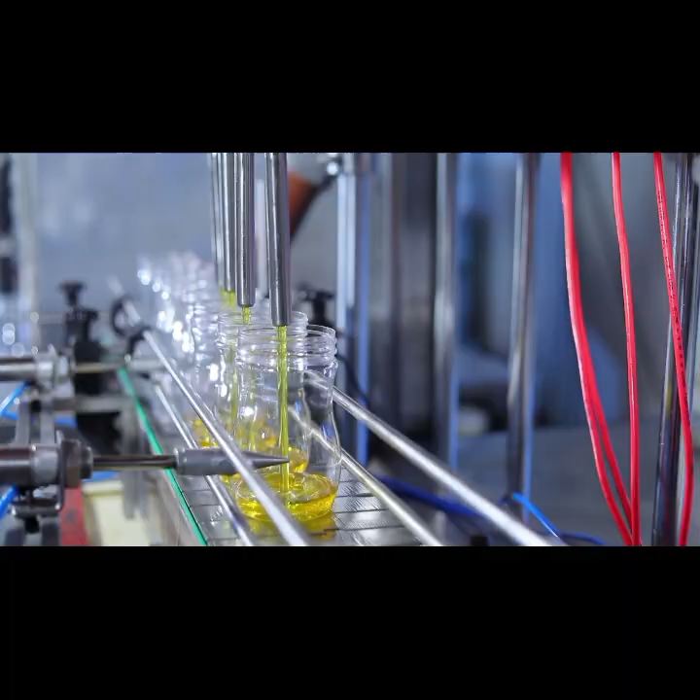Have you ever seen a factory line where machines move with perfect timing, sensors detect every product, and motors run automatically without human control? Behind all that precision lies one of the most powerful inventions in industrial history, the PLC, or Programmable Logic Controller. In this video, we'll explore what PLC programming really means, how it works, and why every modern industry, from the Gulf region's oil fields to Western manufacturing plants, depends on it.

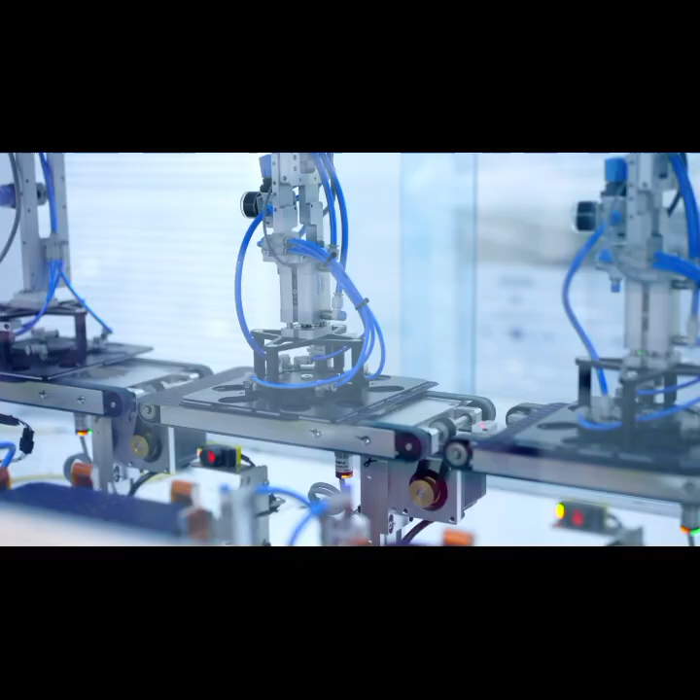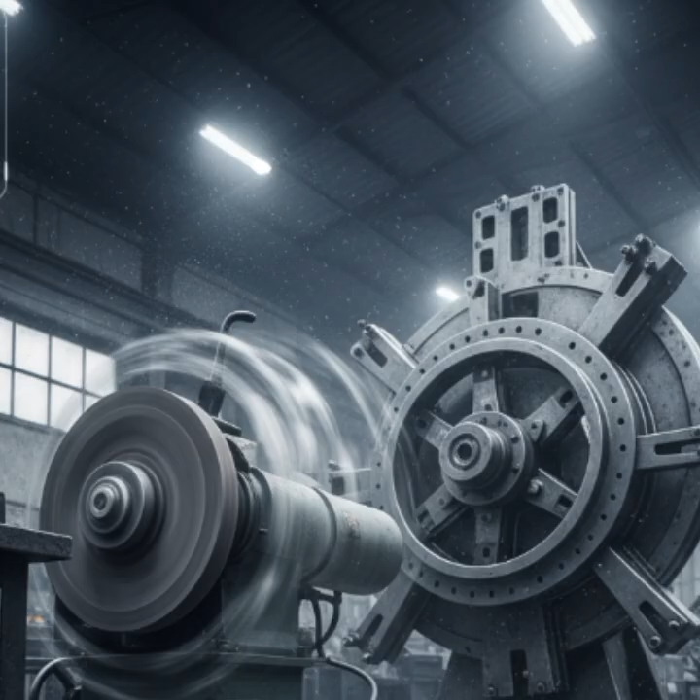1. What is a PLC? PLC stands for Programmable Logic Controller. It's basically a small industrial computer that controls machines and processes. But unlike your home computer, a PLC is built to work in extreme conditions: high temperatures, dust, vibration, and electrical noise. In simple terms, the PLC is the brain of an industrial system.

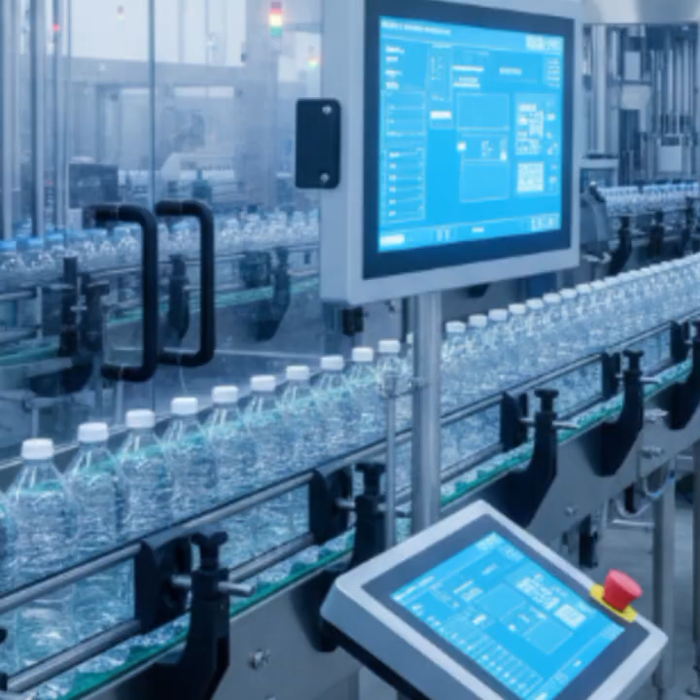It takes inputs from sensors, processes those signals according to a programmed logic, and sends outputs to actuators like motors, valves, and relays. For example, imagine a water bottling plant in Dubai. Sensors detect when a bottle arrives at the filling station. The PLC processes that signal and commands the filling nozzle to open for a specific time. Then it tells the conveyor to move the bottle to the next stage. All this happens in milliseconds, perfectly timed and controlled.

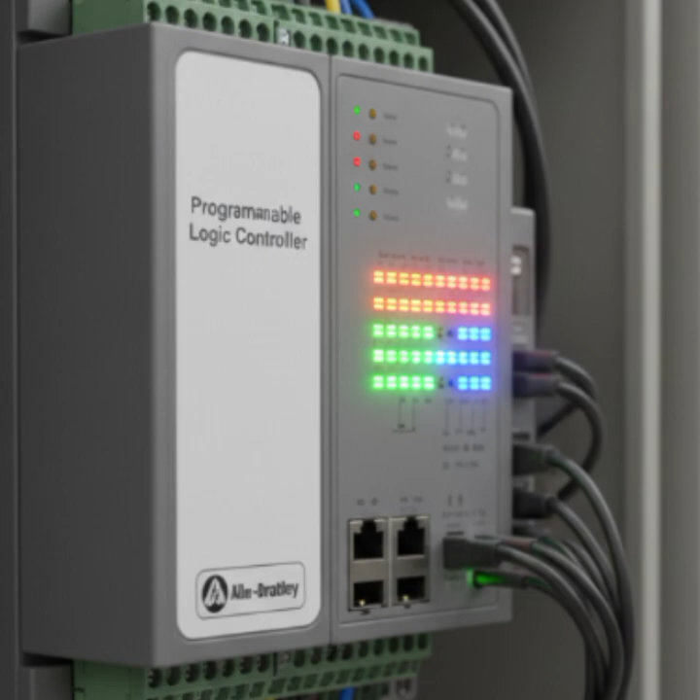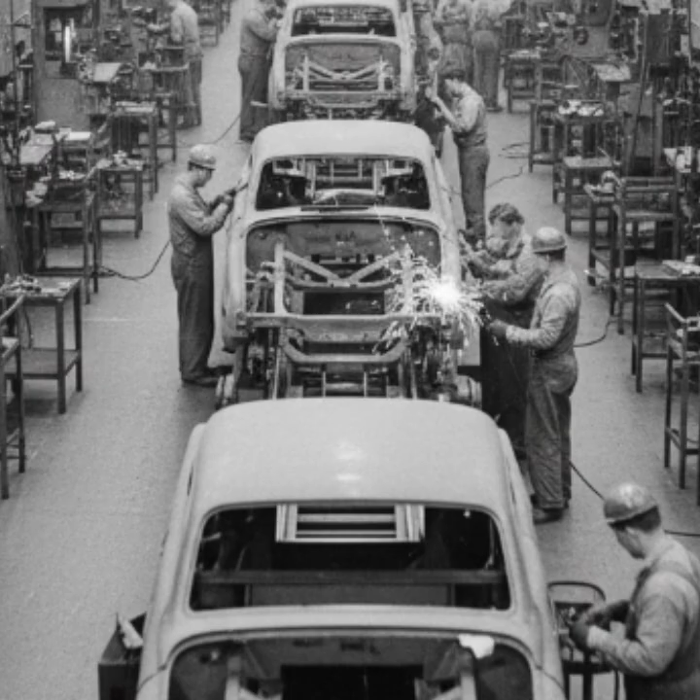2. Why was the PLC invented? Before PLCs, industries used complex relay panels, hundreds of relays and timers wired together to perform simple control tasks. If a process needed to change, technicians had to manually rewire the entire system. In 1968, engineers at General Motors needed a better solution for their automotive production lines. They wanted something flexible, reliable, and programmable, and that's how the first PLC was born.

Since then, PLCs have evolved from simple logic devices to powerful industrial computers capable of handling thousands of I/O points, communicating over networks, and even performing advanced diagnostics.

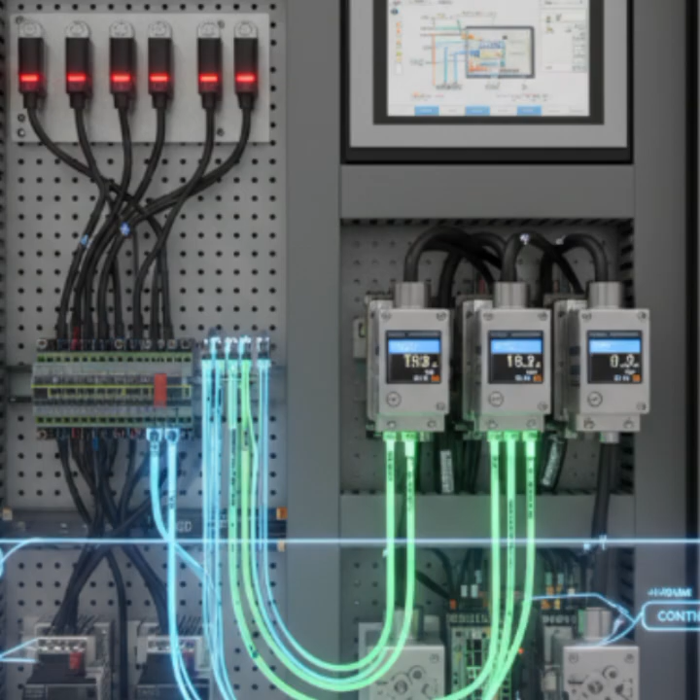3. How PLCs work. Let's look at how a PLC actually works. A PLC system has three main parts: input, processor, and output. Input section: this part receives signals from sensors like limit switches, pressure transmitters, flow meters, and proximity sensors. The signals tell the PLC what is happening in the field, for example, whether a valve is open or closed.

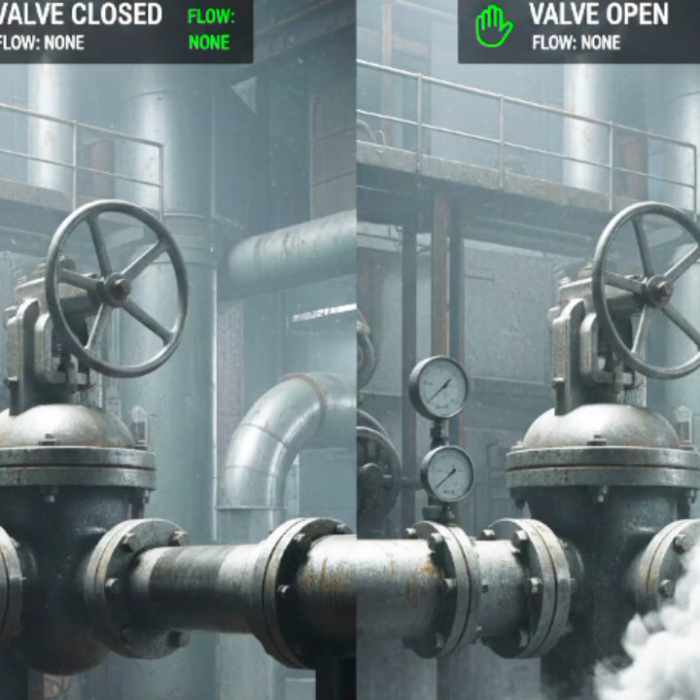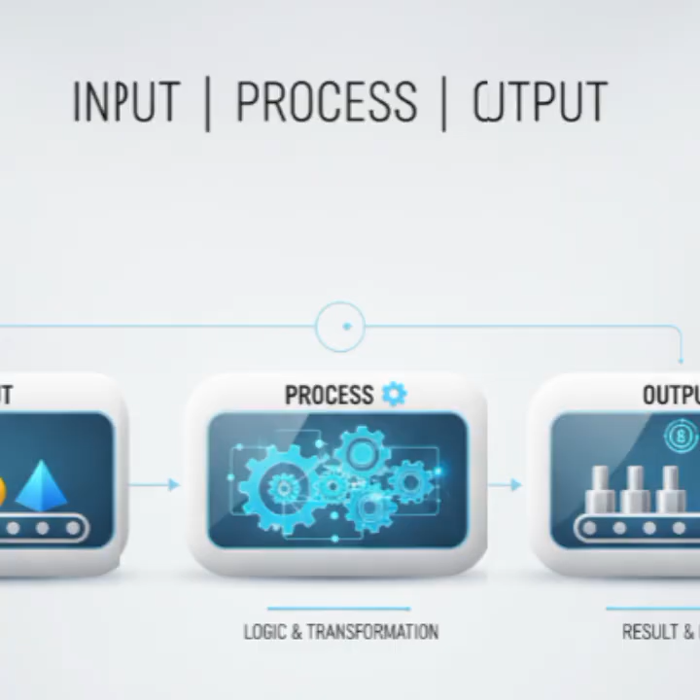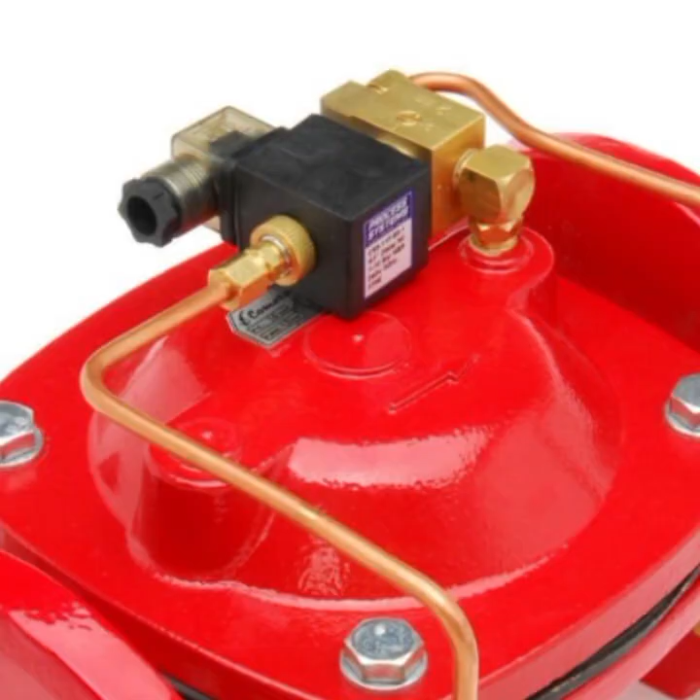Processor or CPU: this is where the main logic or program runs. The CPU continuously scans all input signals, executes the programmed logic, and updates the output devices. Output section: this part sends signals to control devices like solenoid valves, contactors, alarms, or motors. This entire cycle, read inputs, execute logic, update outputs, is called the scan cycle. And it happens hundreds of times every second.

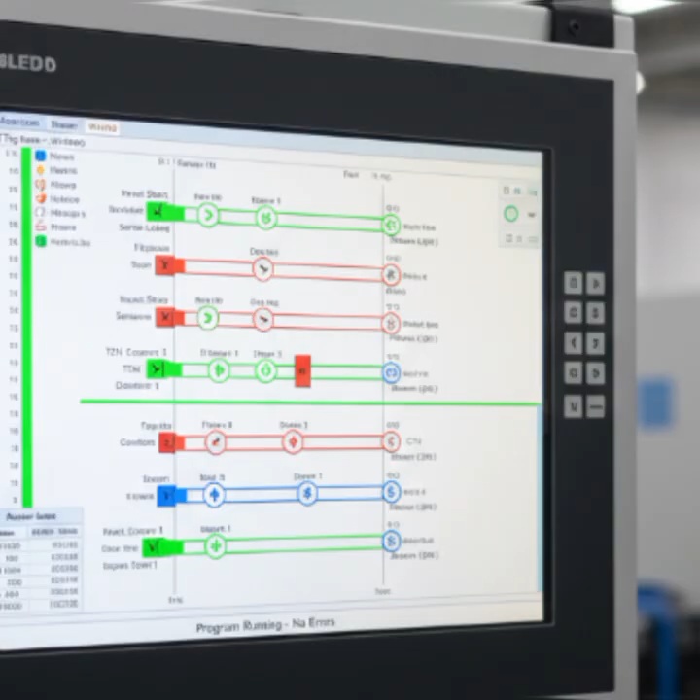4. What is PLC programming? PLC programming means writing instructions that tell the PLC how to respond to inputs and control outputs. Think of it as teaching the PLC how to think logically. The most common PLC programming language is ladder logic, because it looks like a ladder, with rungs representing control operations.

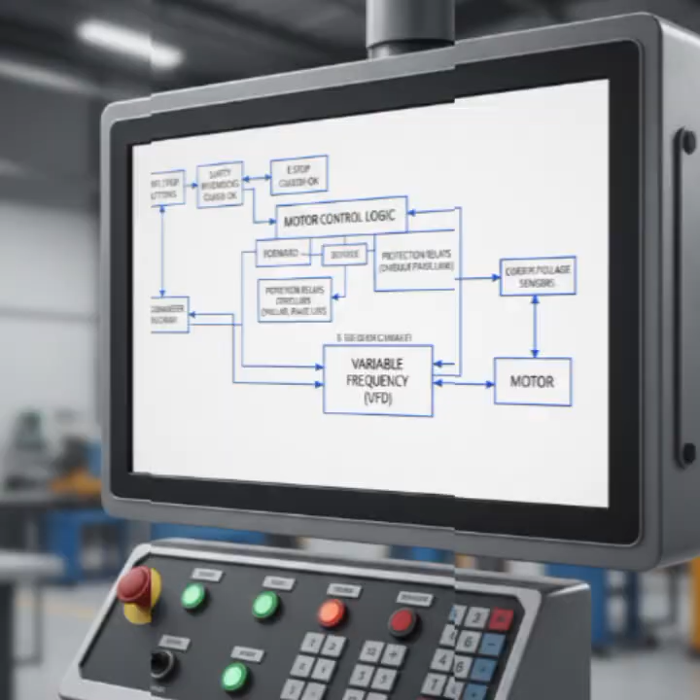Each rung is a simple logic condition, for example, if start button is pressed and stop button is not pressed, turn on motor. There are other languages too, like function block diagram, structured text, and sequential function chart. But ladder logic remains the most popular because it's easy for electricians and technicians to read.

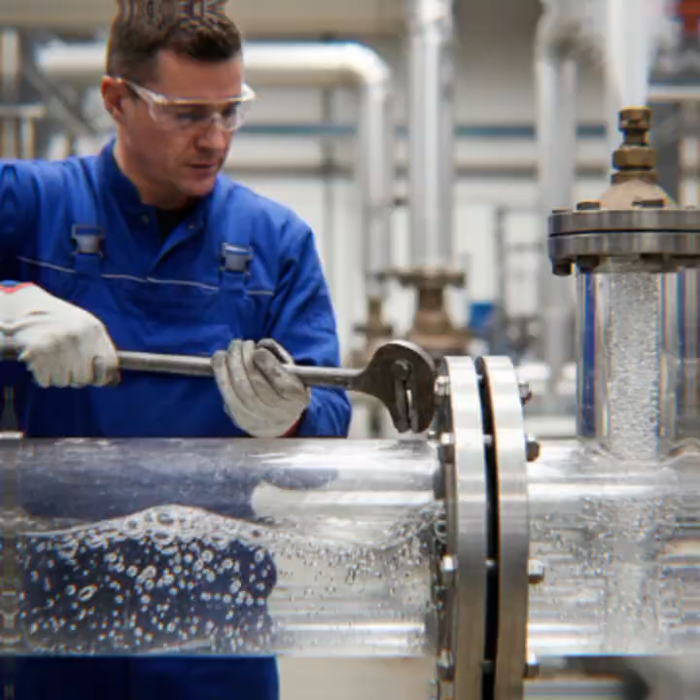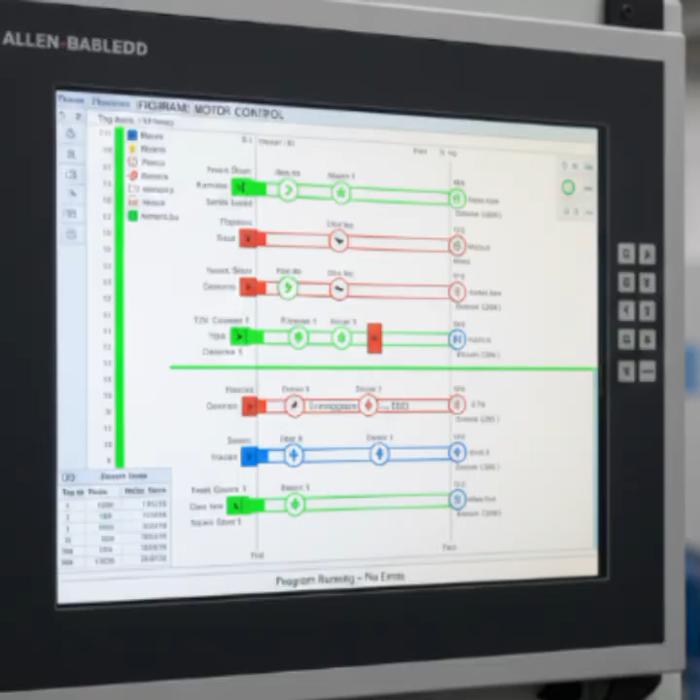5. Example of PLC logic. Let's take a simple example. You have a motor that should start when you press a green button and stop when you press a red button. In the PLC program, the green button input is assigned to one address, let's say I0.0. The red button is I0.1, and the motor output is Q0.0. In ladder logic, you create a rung that says, if I0.0 is on and I0.1 is off, then energize Q0.0.

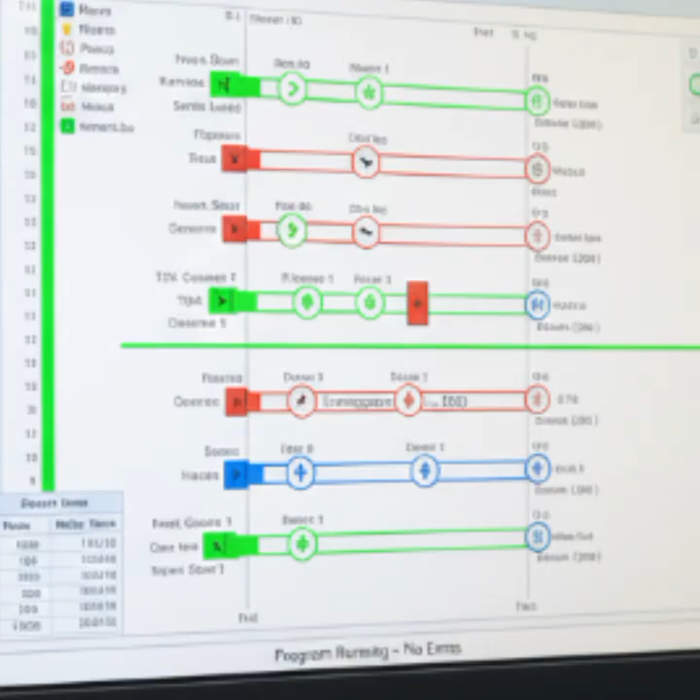When you press the green button, the motor starts. When you press the red button, the motor stops. Simple, right? That's the beauty of PLC programming: logical, visual, and reliable.

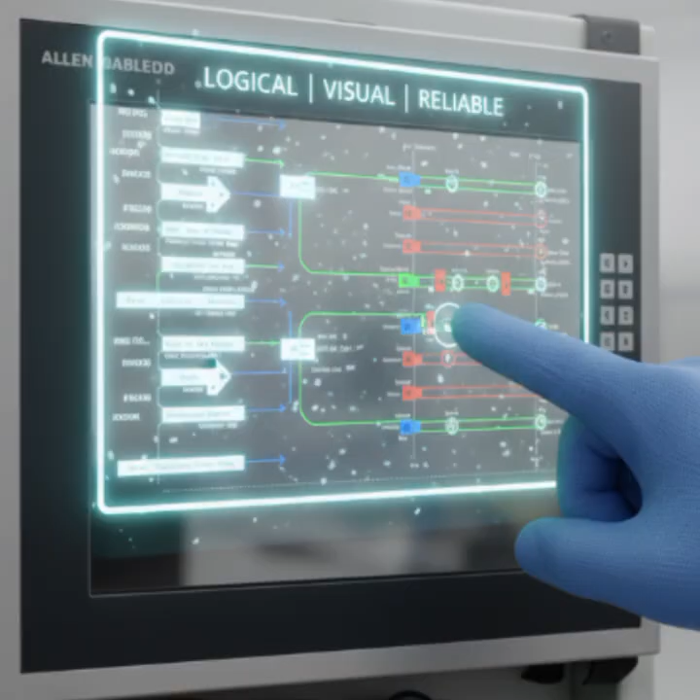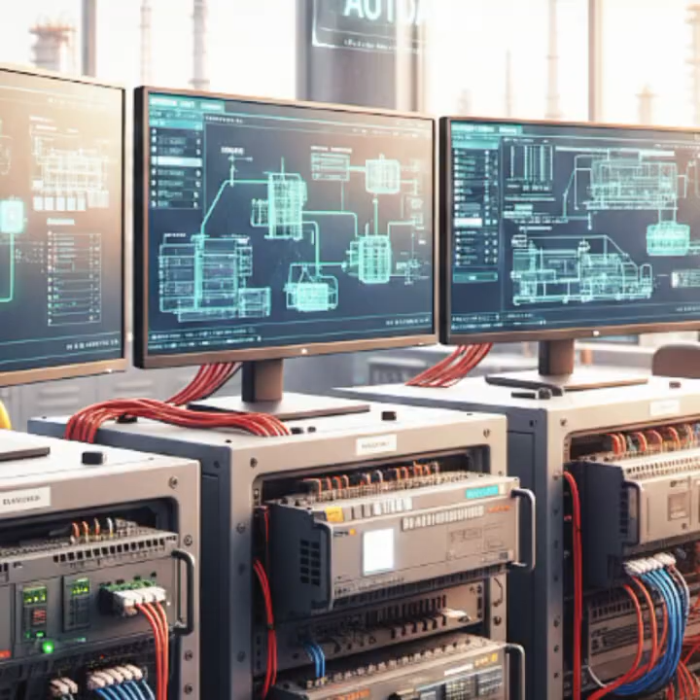6. PLC brands and types. In the global market, you'll find several major PLC brands. The most famous ones are Siemens, Allen-Bradley, Rockwell Automation, Schneider Electric, Omron, Mitsubishi, and Delta. In the Gulf region, especially in oil and gas plants, Siemens and Allen-Bradley dominate due to their robustness and integration with SCADA systems. In Western industries, Rockwell Automation and Siemens are often used for manufacturing and process control.

PLCs come in two main types. Compact PLCs, which are small and suitable for simple machines. Modular PLCs, where you can add extra modules like analog inputs, communication ports, and special I/O cards for larger systems.

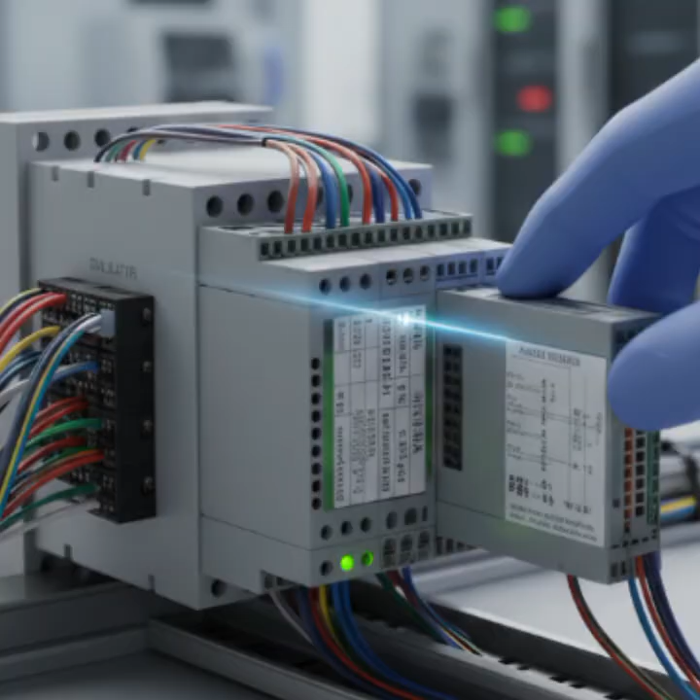7. PLC and SCADA integration. PLCs rarely work alone. They are usually connected to a SCADA system, supervisory control and data acquisition. While the PLC handles field-level control, SCADA provides real-time monitoring, data logging, and remote operation from a control room. In Gulf refineries, water treatment plants, and power stations, PLC and SCADA integration ensures safe and continuous operation, even in harsh desert environments.

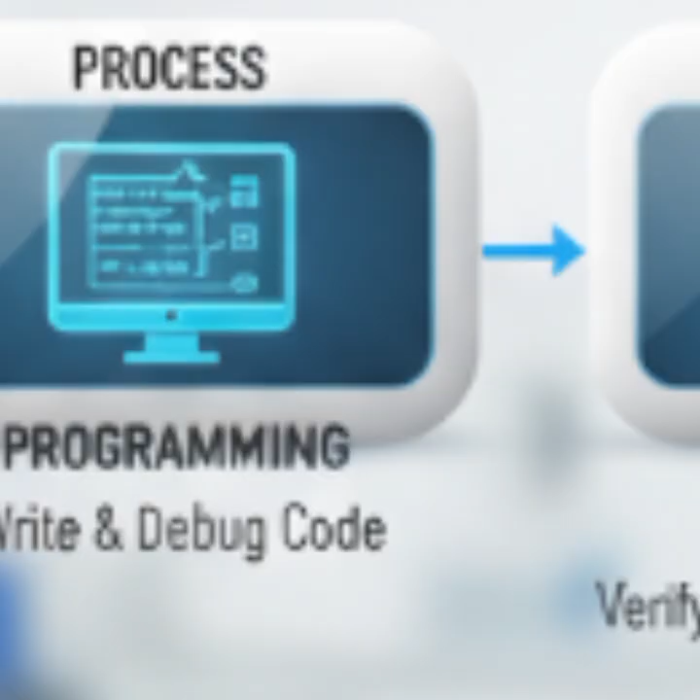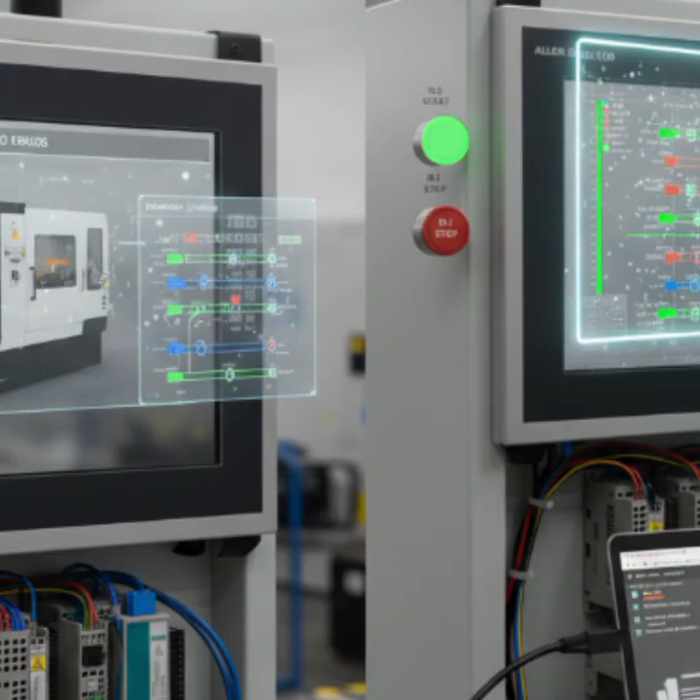8. PLC programming process. The process of developing a PLC program involves several steps. Understanding the process or system requirements. Preparing input-output lists and control logic diagrams. Writing the program using the chosen PLC software, such as Siemens TIA Portal or Allen-Bradley RSLogix. Simulating and testing the program. Downloading it to the PLC and commissioning the system. A good programmer always follows structured programming practices to ensure safety, scalability, and easy troubleshooting.

9. Future of PLCs. PLCs are evolving rapidly. Today's advanced models are part of the Industry 4.0 revolution, supporting IoT connectivity, cloud data integration, and predictive maintenance. In Western factories, PLCs now talk directly to smart sensors and cloud platforms, while in the Gulf, industries are upgrading legacy systems to digital PLC networks. The future PLC engineer needs not only logic programming skills but also knowledge of networking, cybersecurity, and data analytics.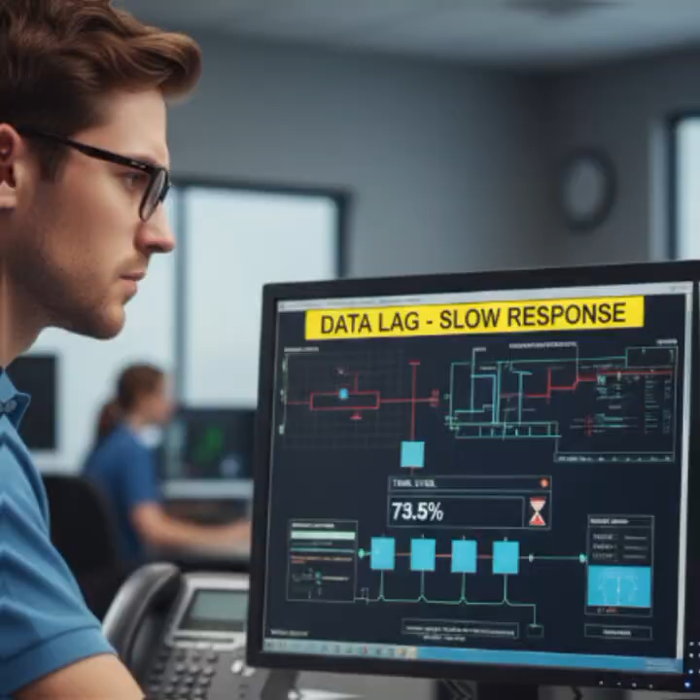10. Why you should learn PLC programming. If you are an instrumentation or automation technician, learning PLC programming opens global opportunities. Industries in Dubai, Saudi Arabia, Qatar, and across Europe and the USA are always looking for skilled PLC programmers who can maintain, troubleshoot, and optimize control systems. It's not just a technical skill, it's a career gateway. Whether you work in oil and gas, manufacturing, food processing, or water treatment, PLC knowledge makes you valuable and future-ready.

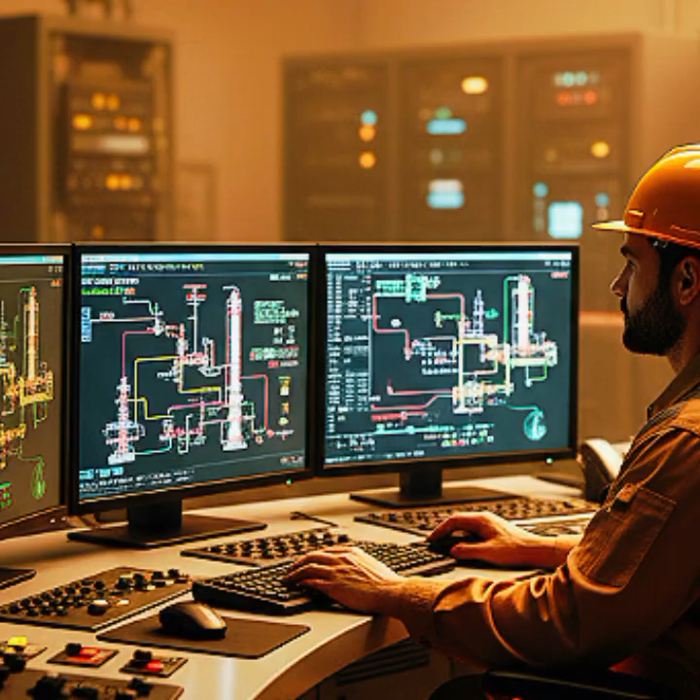Conclusion. PLC programming is the heart of industrial automation. It combines logic, control, and technology to make systems run efficiently, safely, and smartly. From Gulf refineries to Western factories, PLCs keep our world moving, silently and precisely. So if you want to start a strong career in automation, begin with PLC programming. Because understanding the brain of the industry means understanding its future.